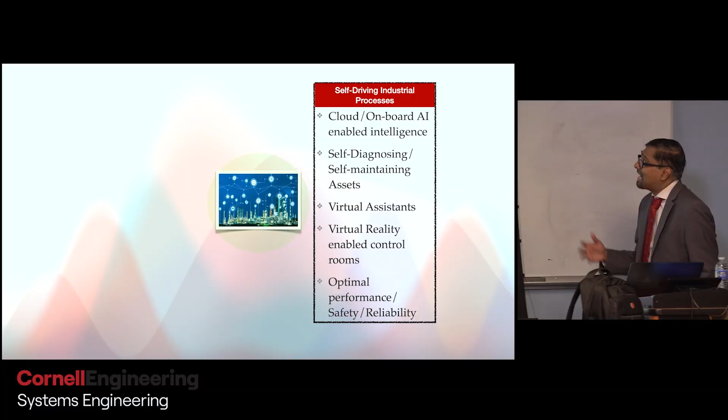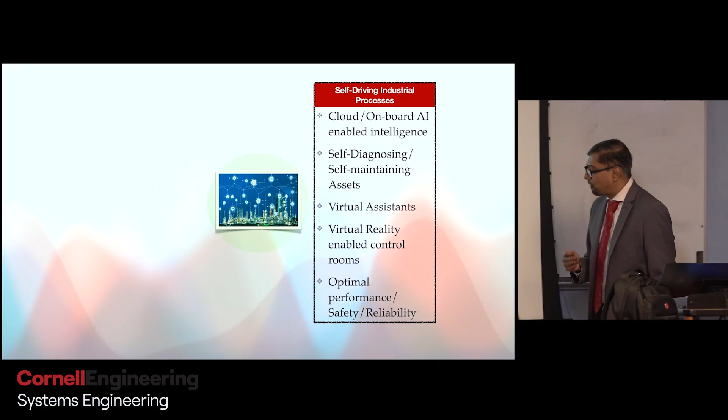So in my group, our focus is on building self-driving industrial processes that include cloud onboard AI-enabled intelligence, self-diagnosing, self-maintaining assets, virtual assistants, virtual reality-enabled control rooms, all of this while guaranteeing optimal performance, safety, and reliability. How do we get there? It's not an easy task. Most industries are already very highly automated, but I think the new tools that are available to us in machine learning and artificial intelligence will enable us to take the level of automation to a much higher level.

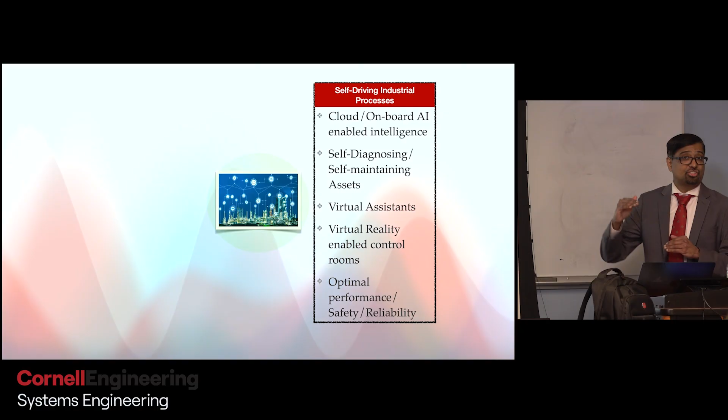In 2019, there was a really nice paper published by Alf Isaksson in the Journal of Process Control on different levels of automation that are possible in the industries.

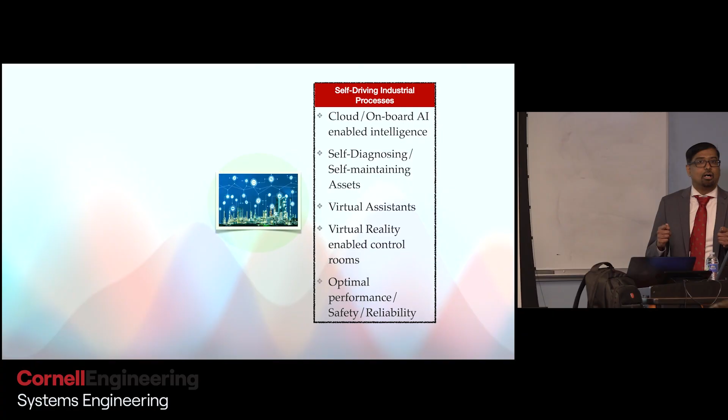With the new tools that we have, and by putting all of these things together, I believe a much higher level of automation can be achieved in the process industries. Now, in order to do that, you have to put together different pieces, and that's where we focus our research. I want to talk about some of the applications we engage in often, then the major areas, and after that we'll shift gears into reinforcement learning.

Canada, as you might know, is a really large country. In terms of land, it's probably larger than the United States, but we don't have the same population. Canada has only about 40 million people, approximately. It is natural resource intensive, meaning the industries in Canada are mostly in the natural resource sector.

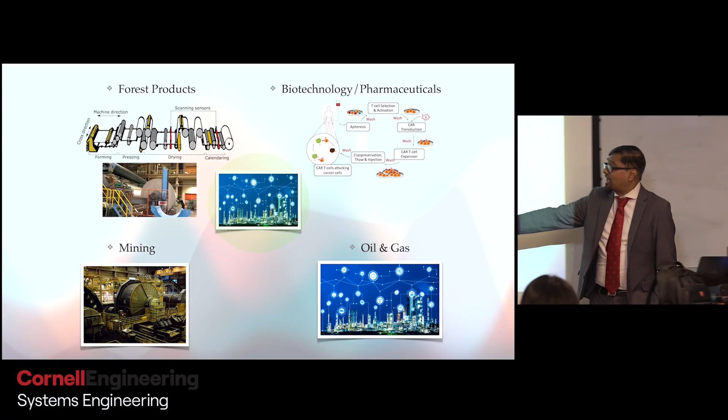We work with the mining industry quite a bit. We work with oil and gas industries. We also have very strong biotechnology and pharmaceutical industries. So these are some of the industries my research group works in.

More recently, we've been working on smart building, space, and energy management. For many years, we've also looked at advanced battery management systems, especially state of health and state of charge estimation. More recently, we've been looking at accelerated material discovery for carbon capture and storage. We also work on health analytics.

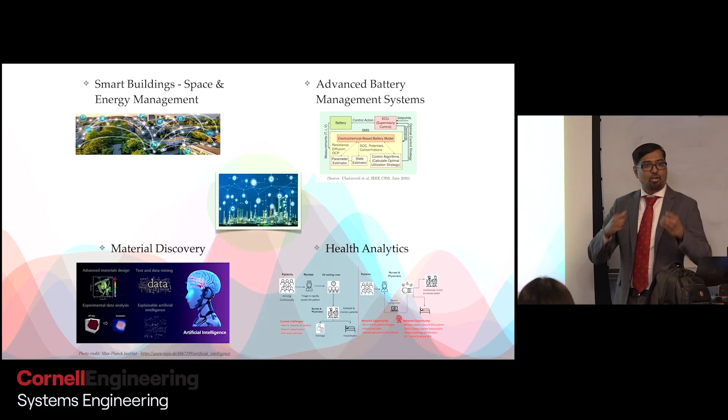For instance, we have a project right now where we are using sensors on patients in emergency departments, collecting a lot of data on their health - heart rate, oxygen levels, blood pressure, etc. - putting it in the cloud and using that information to triage patients more effectively and efficiently in healthcare settings.

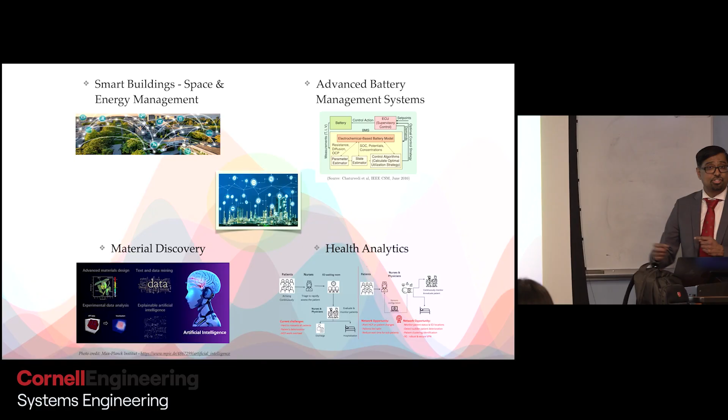For instance, Canada has a population of 40 million people, and apparently there are approximately 30 million visits to emergency departments every year, and the average wait time is about 7 hours or so. So what we're trying to do is use this data from the patients, put it in the cloud, and process it using machine learning tools to triage patients more effectively, and then process them through these emergency departments much faster.

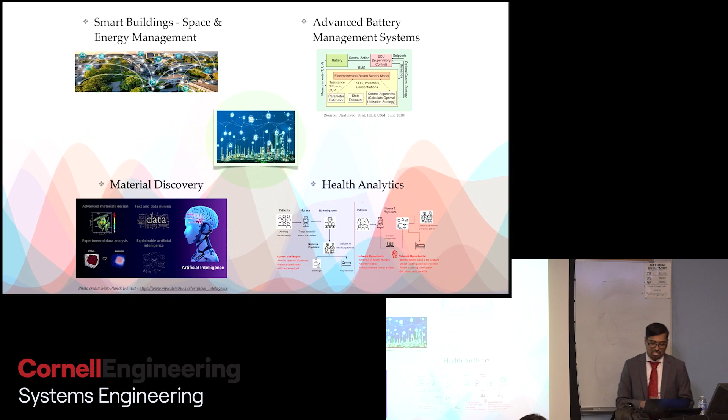So those are the application areas, and you're probably wondering what's the common thread connecting all of these areas. In all of those areas, except perhaps in biotechnology and pharmaceuticals, we generate enormous volumes of data. There's a lot of data, and often this data is heterogeneous - you have time series data, categorical data, images, text, videos, etc.

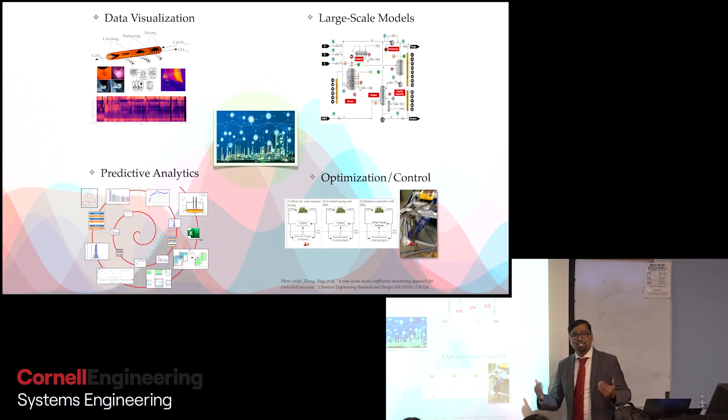In the past, in process industries, we used to focus primarily on time series data. We've been doing artificial intelligence in the process industries for maybe 3-4 decades - some of my senior colleagues would certainly argue that - but we've rarely used heterogeneous data. With the tools that we have today, we can use heterogeneous data to solve problems. So that's one common thread or characteristic across the different applications I showed you earlier.

They also are determined by underlying complex nonlinear dynamics that we don't fully understand in many cases. In other words, there's a lot of uncertainty associated with those systems - a lot of noise, stochasticity. So in light of all of these characteristic features that are common across the applications I showed you, how are we going to solve problems and generate actionable insights?

In my research lab, we work in 4 different areas. I am a firm believer in using data visualization even before you use any machine learning tools, in order to extract the most possible information out of data. Oftentimes you'll be surprised - just by visualizing your data in the right way, you will be able to extract a lot of insights from your data.

What you see on the left-hand side is data visualization. I have some projects on data visualization. The picture there is an infrared image of a lime kiln. Lime kilns are really massive - they apparently generate greenhouse gases equivalent to 300,000 cars running on the roads for one entire year.

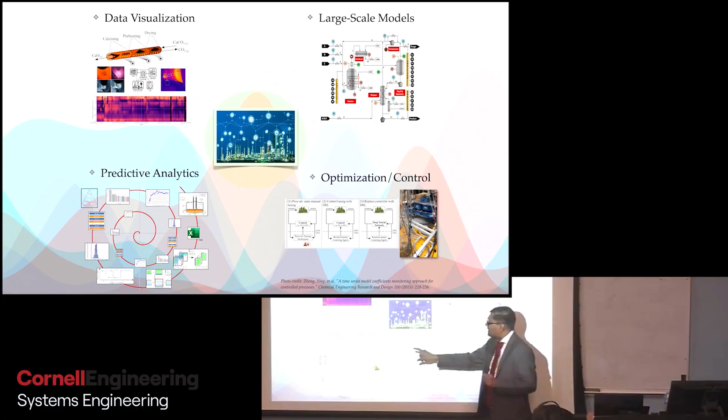The spiral graph that you see here was prepared by one of my students. This picture here is that of an electric furnace. It's a large electric furnace in a mining plant. The electric furnace has two electrodes. At the bottom of these electrodes, there's an electric arc that completes the circuit.

The electrodes are used to melt ore. Every once in a while, they lose the electric arc at the bottom of that electrode, and when they lose the electric arc, they have to restart the furnace. That takes about 15 to 20 minutes. In a year, they have about 800 to 900 such events, which means they lose effectively 2 weeks of production time because of this loss in electric arc.

What we did was we built a wide range of models to allow engineers to predict a loss in electric arc 5 minutes early with 75% probability. So that's one example of how models can be used for predictive analytics.

And finally, we are also interested in taking optimal decisions under uncertainty. You don't know what the future holds. There are lots of things that can go wrong, or lots of things that can change in the future, but you are generally required to take a decision right now to influence what might happen in the future. And that is optimization and control. There are many different ways to do this. And today, what I'm going to do is talk about reinforcement learning. Reinforcement learning is an approach to take optimal decisions in light of uncertainty.

This is a pilot scale facility at Honeywell that we use to design these controllers and implement them. I'm going to talk more about this picture as we move forward with the slides.

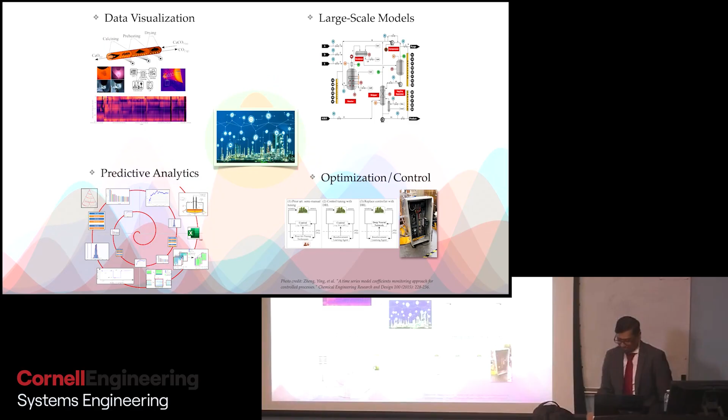Right? All right, so that takes me to the topic of today's presentation: stable and sample efficient reinforcement learning.

How many of you are familiar with feedback control? I would assume everybody, right? Okay, so I'm seeing mostly people nodding their heads, but let's just quickly go through this, just in case you're new to Cornell or new to the systems engineering program.

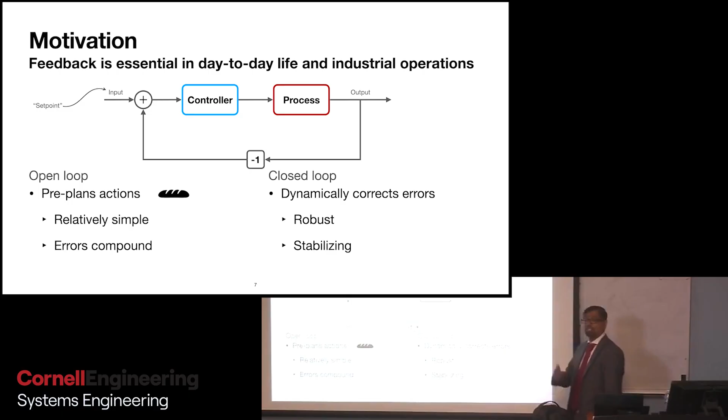This is a standard feedback loop. We don't use open loop because if you use open loop, you have to pre-plan your actions. It's relatively simple, but errors often tend to compound, meaning you won't be able to track your input signal. On the other hand, if you have a closed loop system, then you can dynamically correct errors. Closed loop systems are robust, and they can also be stabilizing.

But the problem is, typical process industries have hundreds of these loops, hundreds of controls, hundreds of closed loops. If you have one control loop, it's manageable. You can identify a model, you can synthesize a controller, and validate it. But what if you have hundreds of control loops? That calls for a new paradigm. Is there a way to automatically scale your controller and tune all of them at the same time?

There are, of course, controllers, multivariable controllers like model predictive controllers, but I'll tell you why tuning them is not straightforward. A few years ago, when I was doing my PhD, an engineer working at an oil refinery told me that a vast majority of their controllers are actually not tuned because they just use default settings. Default settings in these control loops are robust, they give you robust performance, but they don't give you the performance. Often, because of lack of time and the effort involved in tuning control loops, engineers tend to use default settings. What it means is you have a stable process, but you're not extracting the best out of your controllers.

So the question that we wanted to ask was, how can we scale these control algorithms? Is there a way to go from process data to the controller directly without having to go through those steps: model identification, synthesis of a controller, and validation?

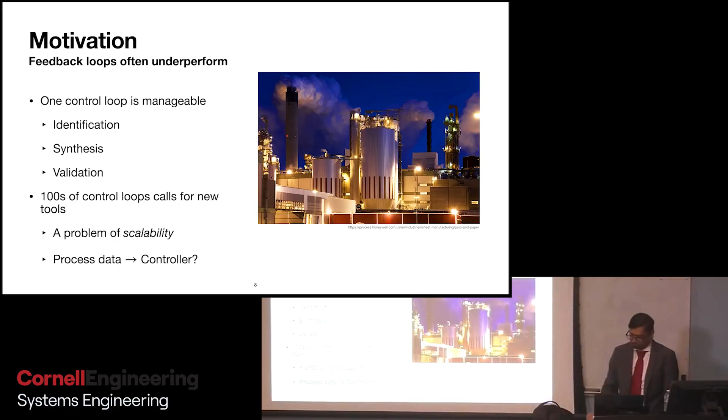So I think in 2018, when deep learning was taking off, there was a lot of interest in it. I went to Honeywell - we've had a very long collaboration with them in North Vancouver - and told them there's this new algorithm, deep neural networks, and we can combine them with reinforcement learning and replace all your control systems. They have existing hardware and software infrastructure they've been using for decades, so I proposed this framework to them.

So you have some system. I'm going to replace your controller, or approximate it, with a deep neural network, and then add a reinforcement learning agent on top of it.

You might ask, why do you want to do that? The current state of art is depicted in this picture here. You have a system, there is a controller, either a PID controller or a model predictive controller, and those controllers need to be maintained. If you don't maintain them, you're going to lose the performance from those controllers.

For instance, someone from a refinery showed me a very interesting graph. On the x-axis you have time, on the y-axis the performance of a model predictive controller. Typically it takes about two weeks for a few engineers to design and commission a model predictive controller on a large-scale process, and then you start reaping the benefits of having installed it.

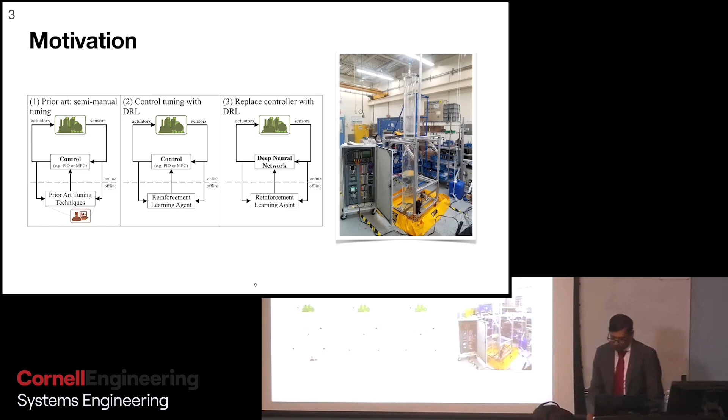Now, there are a few problems. As soon as we started thinking about it, a few challenges became very obvious. I'll describe what reinforcement learning is in just a moment, but think of it as a tool that allows you to take optimal decisions in the face of uncertainty.

You can leverage observed data to improve operations, directly using the data to improve your ability to control a process. If you're using reinforcement learning, you need minimal prior domain knowledge - in other words, you don't need a model. You can of course use a model to build a reinforcement learning controller, but even without one, the beauty of reinforcement learning is it's going to probe the system and help you design a controller or agent that's going to control your system. Therefore, you can automatically maintain controllers on a variety of systems. That's the benefit of reinforcement learning: it's going to probe the system, learn it, and automatically start controlling it.

But the problem is it's going to introduce additional algorithmic complexity. There are auto-tuners that already exist in the industry - for instance Honeywell, and all the major vendors of control software have existing auto-tuners. And when you use reinforcement learning, you really have to guarantee stability during and after training. Stability is an absolute minimal requirement when designing a controller. If you can't guarantee closed-loop stability, nobody's going to use those tools. So we wanted to make sure reinforcement learning guarantees stability. There are not that many results in the literature on reinforcement learning that is guaranteed to be stable.

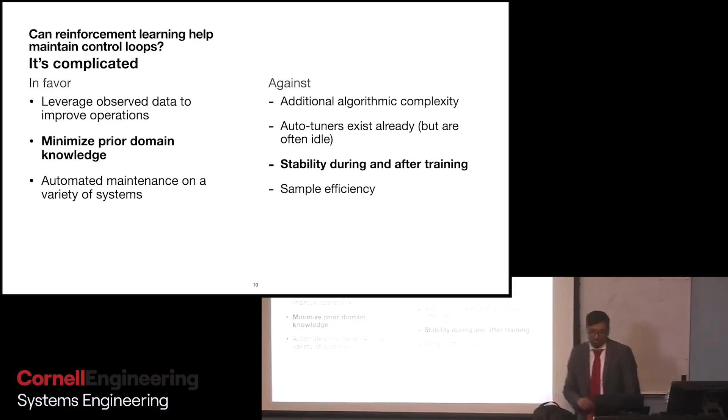Our goal really is to balance automation and scalability of reinforcement learning with control theoretic tools to create efficient and safe improvement. In the next few minutes it's really simple right now, and we're going to slowly ramp up the complexity of these algorithms. If you don't understand, it's okay, I don't expect everybody to understand everything I'm saying. If you do understand, come to me, I'd like to offer you a job. But there are a few takeaway points I hope you can get by the end of this presentation.

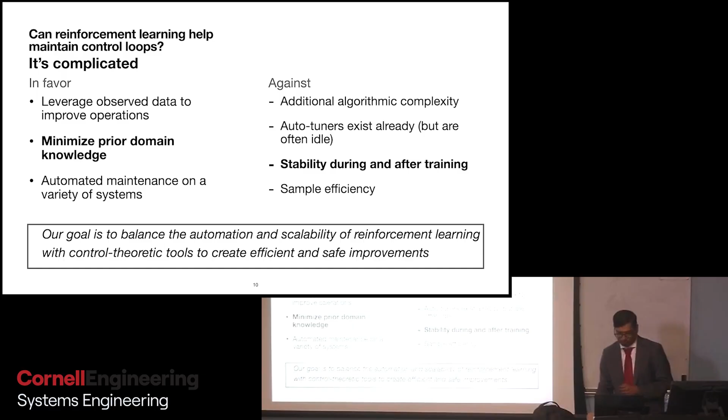We're going to do this with reinforcement learning. Reinforcement learning has been around for many decades, you've probably seen it or heard about it in many different ways. Right now it's widely used in a number of different areas, it's used in building games, software for games, it's used even in fine-tuning large language models, and it can replace control theory. There are a lot of parallels between control theory and reinforcement learning. I think these two areas have developed over many decades in parallel, but there are lots of areas of commonality.

The idea is if you have an environment or a system, you use an RL algorithm and an RL agent that's going to generate some actions. Those actions result in observations. Observations are then used by the algorithm to generate new actions using what is called a reward. The agent is given a reward function, and its goal is to maximize that reward as it performs actions. I'll get into reinforcement learning again in a few minutes, but that's broadly the idea at a high level.

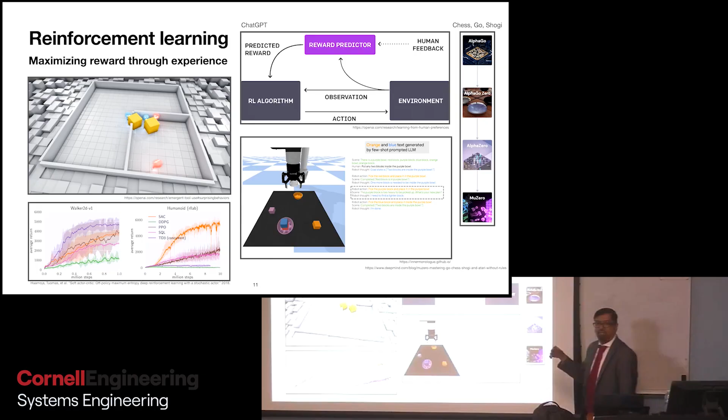Reinforcement learning people have been using reinforcement learning in process systems engineering. There are many papers published recently. I would say one of our papers, I think it's here, it's probably not here, that one over there, was probably one of the first papers published in PSE with deep reinforcement learning.

Although I would credit Professor Jay Lee at University of Southern California for introducing reinforcement learning in PSE. They did not call it reinforcement learning, and I think that was their mistake. They called it approximate dynamic programming. A good friend of mine at Seoul National University, who worked with Professor Jay Lee, was instrumental in bringing these ideas to process systems engineering.

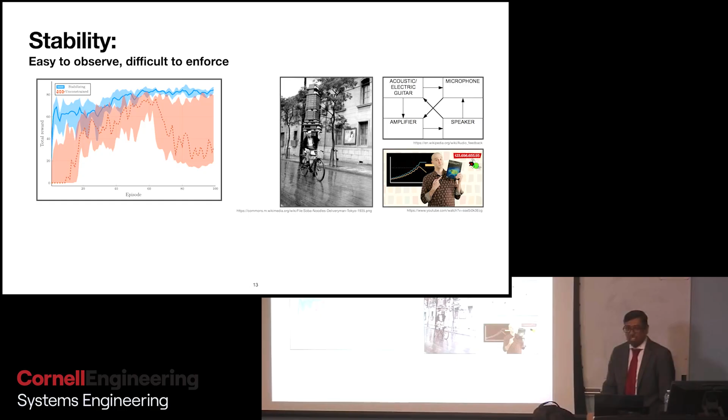Now as I mentioned earlier, the problem with reinforcement learning is that we cannot guarantee stability, and we also want to make sure that it is sample efficient. It's not consuming a lot of data.

All of, or a vast majority of, applications of reinforcement learning that you see in computer science are, say, in gaming or related areas where you have a lot of data you can simulate. For instance, if you want to build software that plays the game of chess, you can generate lots of data. There is no limit to how much data you can generate.

But on the other hand, if you want to use reinforcement learning in real systems, in the process industry, you cannot generate lots and lots of data because generating data costs money. There was a speaker from Stanford who gave a talk at UBC maybe a couple of years ago, saying that they do some physics experiments at Stanford. Collecting one data point costs them $1 million.

So you can't use a tool like reinforcement learning to generate data from experiments of that type. I mean, that's an extreme case, but in many systems engineering problems, generation of data does not come free. You have to be very careful in generating the data. So sample efficiency is a problem with reinforcement learning.

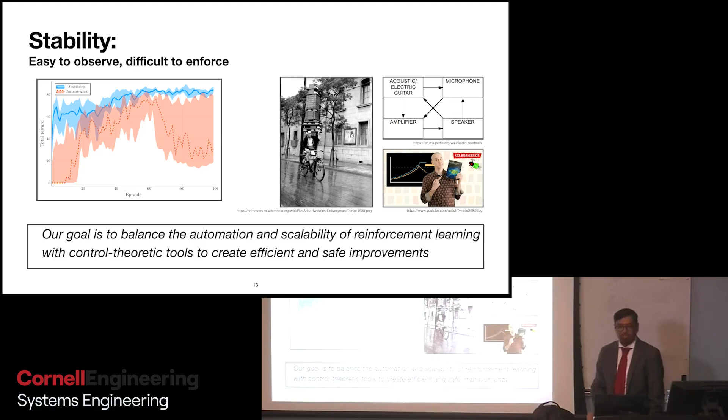So I'm going to start with stability, and I'm going to assume that you all know what stability is. So how are we going to guarantee reinforcement learning is stable throughout its iterations? I'm going to divide this into 3 pieces.

I'll talk about something called Willems' lemma that allows us to characterize the dynamics of a system using data without having to use an explicit parametric model. And then I'll talk about something called Youla-Kučera parameterization, that's a recipe for characterizing all stabilizing controllers.

And finally, learning algorithms. We're going to use reinforcement learning. We'll put all of these three things together to come up with a modular setup that really decouples learning from stability. How many of you know any or all of these 3 ideas or tricks?

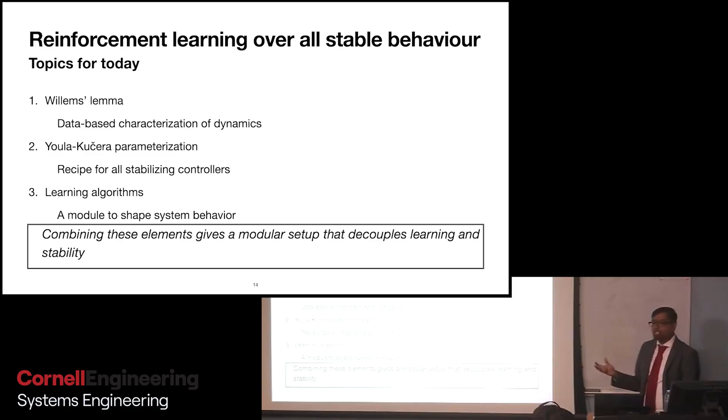Or have heard of? Did anyone hear about Willems' lemma? No? Okay. Youla-Kučera parameterization - if you've taken a course on classical control theory, you would have heard about it. Learning algorithms, I'm going to talk about reinforcement learning. So we'll take our time, and I'll go slowly and try to explain what these are. Hopefully you can take these ideas and use them in your own research or projects.

I'm guessing you're all familiar with standard linear time invariant systems. That's a standard state space model. U's are inputs, Y's are outputs, X's are some states. A, B, C are state space matrices. For simplicity, I'm going to assume that inputs and outputs are scalars. A, B, C are unknown, but we can observe U and Y.

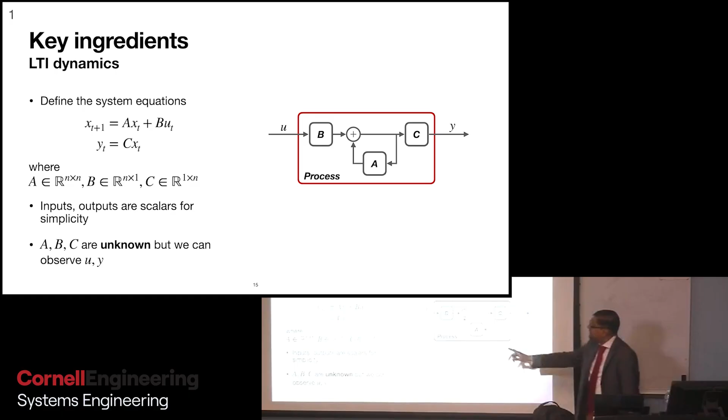A simple state space model. A lot of systems in the industry can be locally, at least, defined using this very simple equation.

You've all heard of, I'm guessing, impulse response - if you all know what an impulse response is. So if you have a state space model, you can very easily write down expressions for the impulse response. The Nth impulse response, Yn, is going to be the product of your state space matrices, C times A to the power of n minus 1 times B. So that's the impulse input, and that is the response.

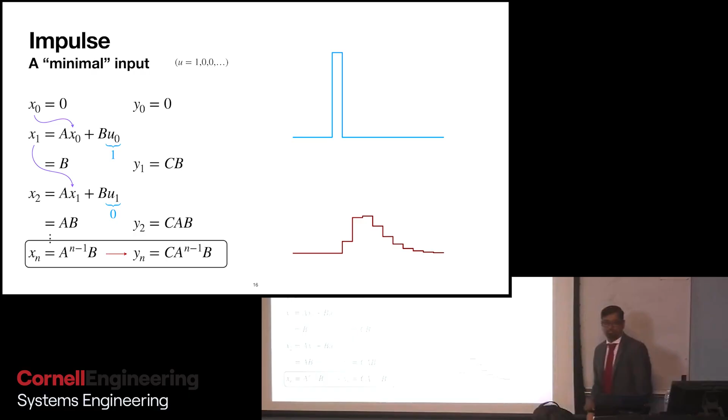There are a couple of concepts I'm going to use to describe Willems' lemma. One is controllability. We've probably heard of controllability and observability. Controllability is the ability to steer a system to any state of our choice. So if you can steer our system to some arbitrary state x star using a certain input, if an input exists so that we can move the system to that x star, then we have a controllable system. It turns out that the matrix with the calligraphic C, if that matrix is full ranked, then you have a controllable system. That matrix is derived from the state space model.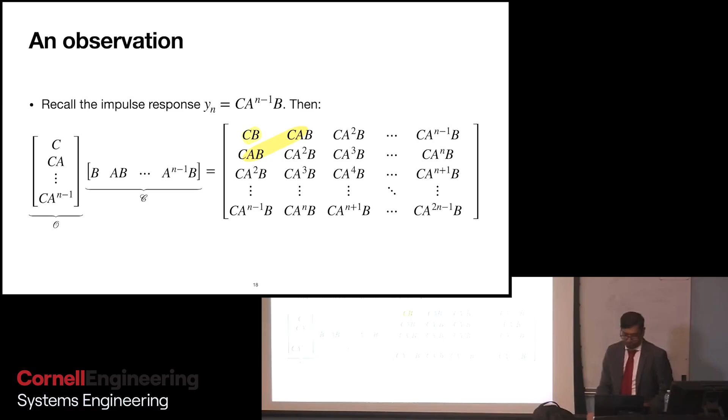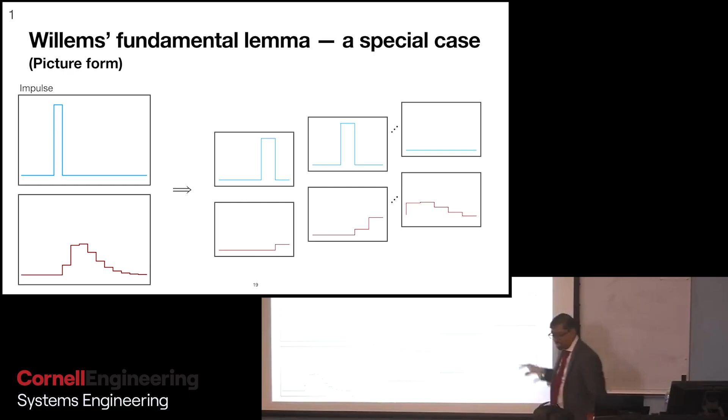So how does it do that? If you have an impulse response, the beauty of linear systems is when you scale or translate the input, you can do the same with the output without having to recalculate everything. So you have an impulse, and then you can move that impulse and generate more impulse responses very easily. As long as you have that, you can generate all of these. And the span of these data vectors really characterizes the input and output combinations, any input and output combinations of a system.

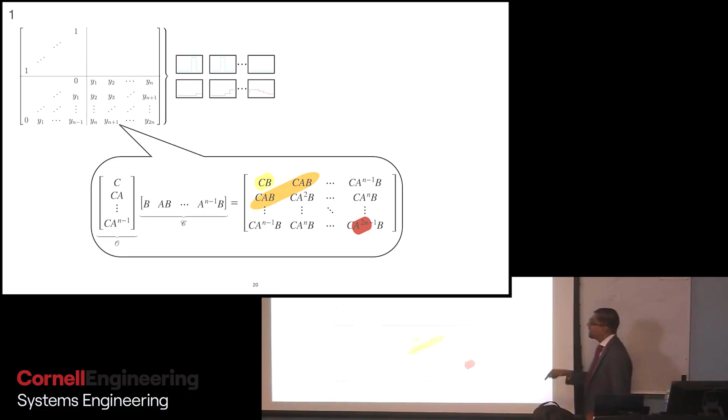Let me take a pause here and explain what I'm trying to do. That matrix on the left-hand side, the span of that characterizes every combination of an input and output of a linear system. And that is Willems' lemma. Let me generalize that.

If you have a given signal zt with capital N data points, we define a Hankel matrix, very similar to the impulse response Hankel matrix I showed you earlier. Willems' lemma essentially states that if you take the Hankel matrix of some inputs and concatenate it with the Hankel matrix of the outputs, the span of that matrix will include every combination of U and Y that you can achieve from a given system. U bar and Y bar are some new arbitrary data.

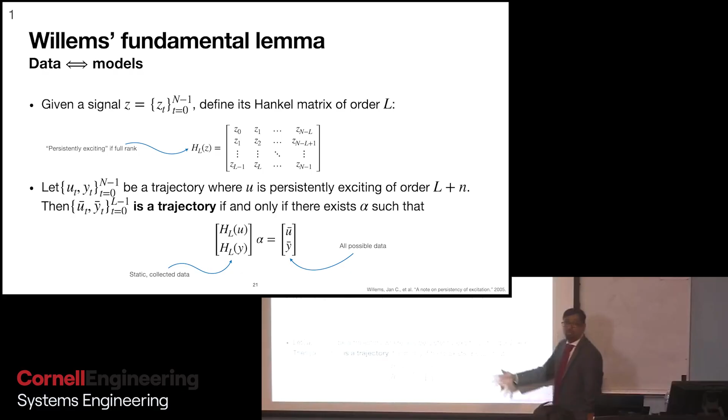So if I collected data U and Y, the data have to be persistently exciting - that's a very important criteria. If the data are persistently exciting of a certain order, and I create these Hankel matrices, H U, H Y, then any new set of data, U bar and Y bar, can be written as a linear combination of the input and output Hankel matrices. That's the core of Willems' lemma.

So what we did was we took Willems' lemma - because once you can do that, you've essentially characterized the dynamics of a linear system, right? Once you have that, you know what the linear system is. So we took Willems' lemma and modified it slightly to account for predicting future outputs. We use what are called nested Hankel matrices. There's a little bit of modification of those Hankel matrices, but it allows us to make predictions on the output. Given any input, we can use these Willems' lemma Hankel matrices to predict what the future is going to be.

Now, the central idea here is we did not use an explicit parametric model to make predictions on the output. We've used existing data. As long as the data are persistently exciting of a certain order, we can use that data, create these Hankel matrices, and that essentially becomes our model. We use that to make predictions into the future.

Yeah, so I think maybe I misunderstood - what do you mean by persistently exciting? Okay, that's a great question. Let's take a simple example. Are you familiar with ARX models, Autoregressive models? The beauty of ARX models is that you can solve for parameters using least squares. So when you use least squares, you have to invert a matrix, right?

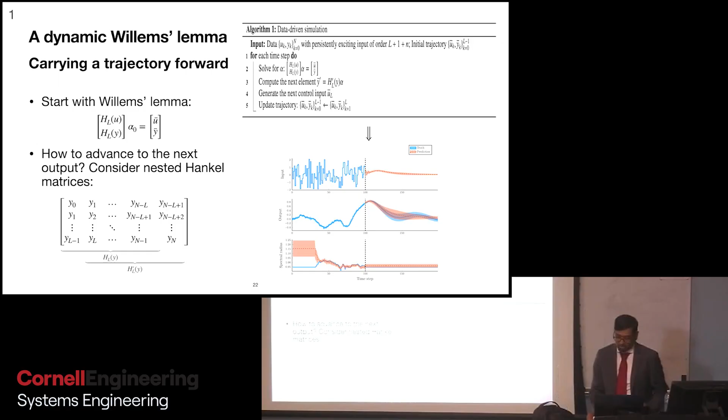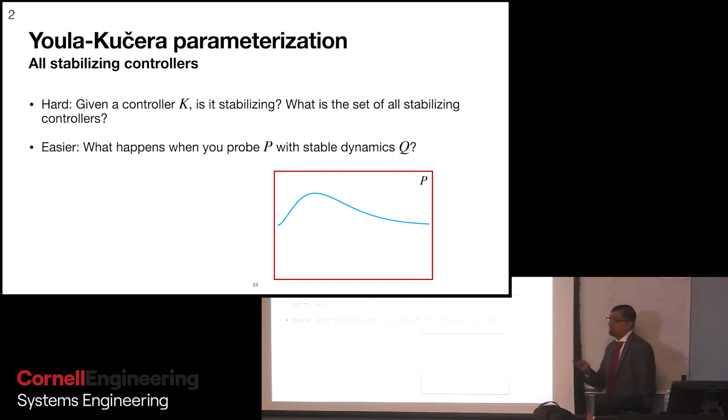Okay, thank you for all those questions. We're going to be a little slow, but that's okay. I have time until 1:15, is that right? Yeah, kind of, about 1:15. We've only made halfway through my presentation. But I appreciate you coming because there's another class. So 1:15, right? They get to ask questions then. Is that right? We stop at 1:15. Okay, alright. So then let's go. A condition, alright. Okay, let's go a little faster now.

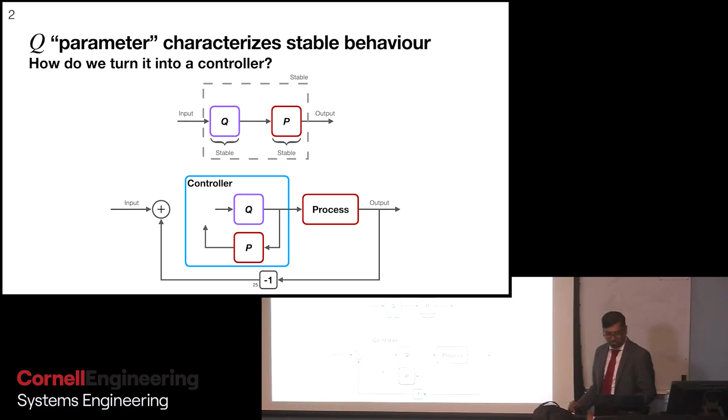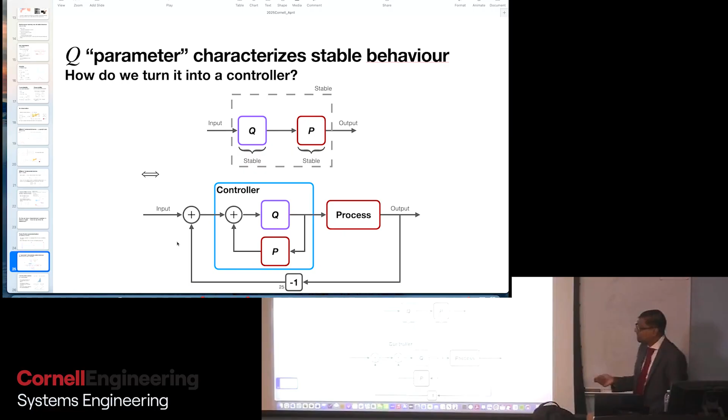So Youla-Kučera parametrization basically says that if you have a controller, a linear controller, and if you can parameterize it in this way, where you use an approximate model of the process P inside the controller and use a Q in this positive feedback structure, as long as you guarantee that this Q is stable, you can also guarantee that the closed loop system is stable. That's what Youla-Kučera parametrization is. You're parameterizing the controller with the model of the process and some new parameter Q. As long as you can guarantee that parameter Q is stable, then the entire closed loop system is also going to be stable.

So what we did was we figured out a way to guarantee that the Q is stable, even for nonlinear systems. This was a paper published in NeurIPS in 2020, 'Almost Surely Stable Deep Dynamics.' We build deep neural networks for Q that are always stable, guaranteed to be stable. Those are nonlinear, by the way—we can use nonlinear Q there, not necessarily linear Q.

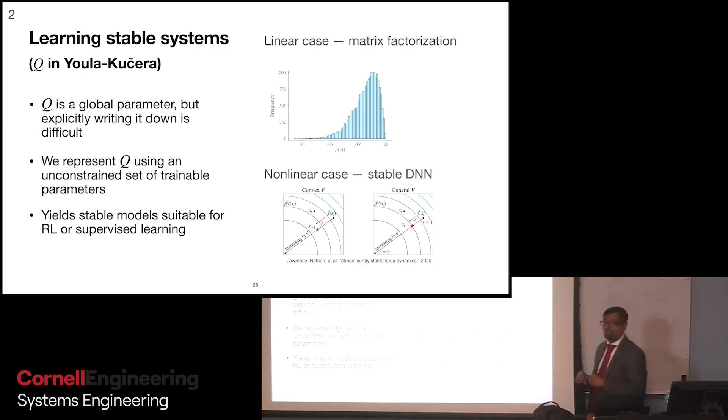I know some of this is probably a bit too much to learn in just a few minutes. So we have two ingredients right now: Willems' lemma, and then the Youla-Kučera parametrization to guarantee stability.

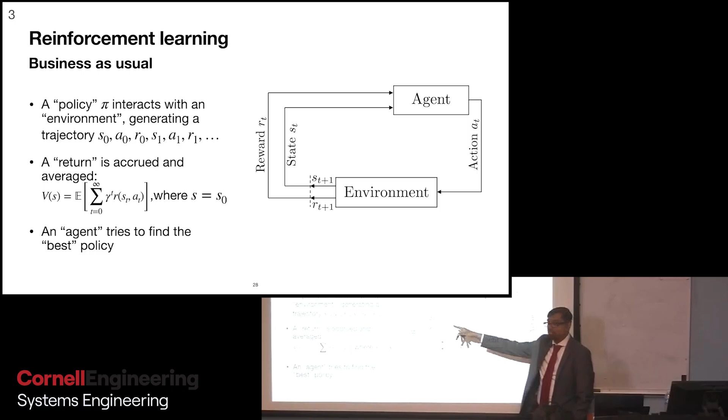And the final ingredient is reinforcement learning. In reinforcement learning, you have an RL agent that generates actions a_t, the environment generates a reward and also a state. The agent looks at the reward and updates its actions. You go through these loops many times iteratively to maximize a certain reward by identifying a policy, which I'm calling pi. Policies are also called, basically, controllers.

Now when you put all of this together, you get reinforcement learning over all stable behavior. This is a representation of the data Hankel matrix in Willems' lemma—that's your model, the process P. This is a representation of all stable Qs, and this is your industrial process. And when you put all of these things together, you will be able to separate learning from stability, and therefore you have a closed loop stable reinforcement learning algorithm.

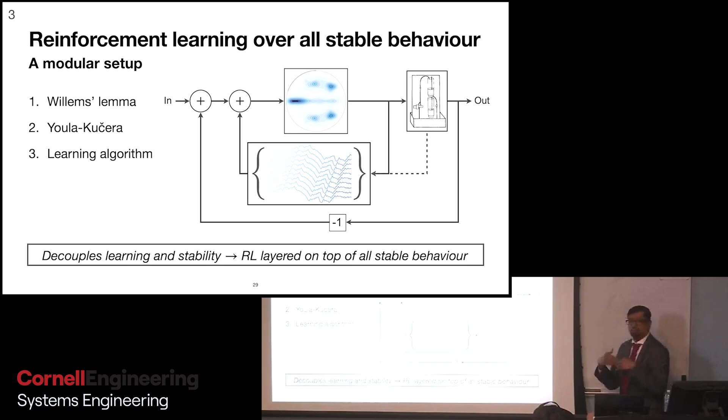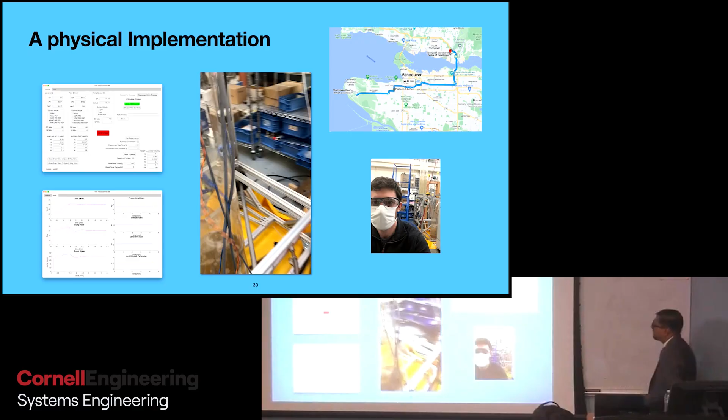We've tried this on a pilot scale plant. That's Nathan Lawrence—he's currently at Berkeley as a postdoc. What you see there is a pilot scale plant that was set up for us at Honeywell.

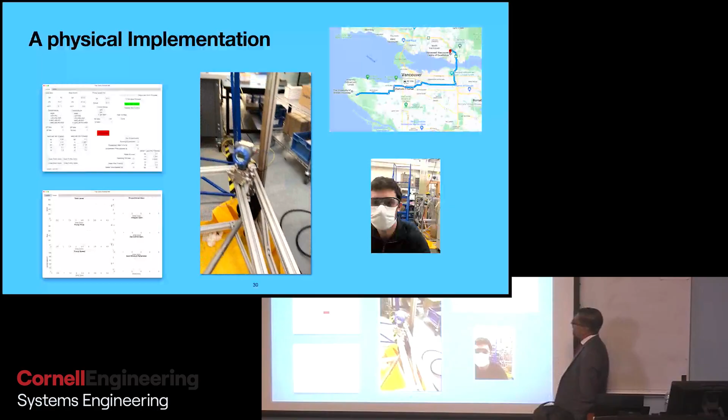University of British Columbia is over here. Nathan used to drive to Honeywell in North Vancouver to perform these experiments. He did some of these during the pandemic, that's why he's wearing a mask.

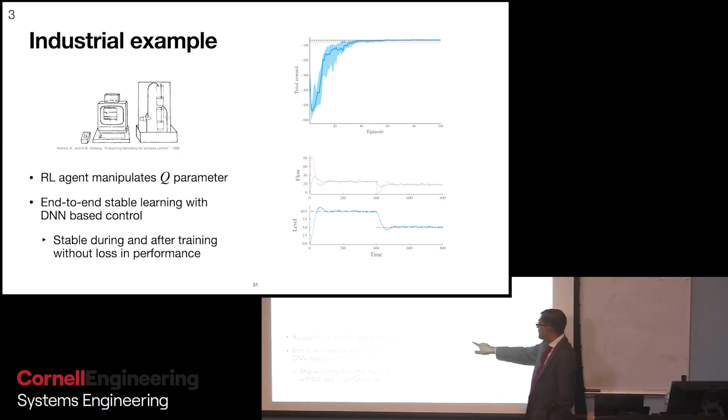As expected, we found that the closed-loop system was always stable, and the system was also tracking the set points really well. I'll give you 5 minutes, I won't be able to finish my entire presentation, but I'll give you at a very high level some of the ideas.

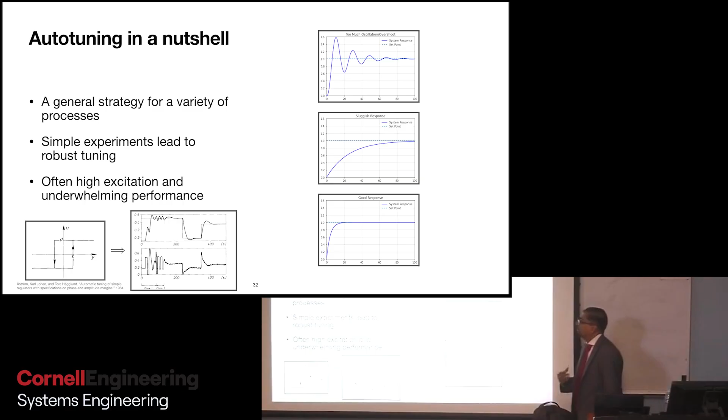So when we finished that, we did all these experiments on a real system, but then we wondered, okay, Honeywell already has these auto-tuners. Why don't we compare what we did with Honeywell auto-tuners? And we very quickly realized—I'll just show you this picture here, this table.

This is a paper that was published in 2024, Control Engineering Practice. Deep RL is our algorithm. AccuTune is a Honeywell auto-tuner. SIMC is Skogestad internal model control—he published a paper, I think, with the title 'The Best Tuning Parameters for PID' or something like that. And on all of these different criteria that we use, deep reinforcement learning performed much better than other controllers, except in one criteria.

That one criteria is time required for tuning. Auto-tuners would tune a controller in about 5 minutes. Deep reinforcement learning took 40 or 50 minutes, right? And that's not acceptable because you're losing production in a live setting.

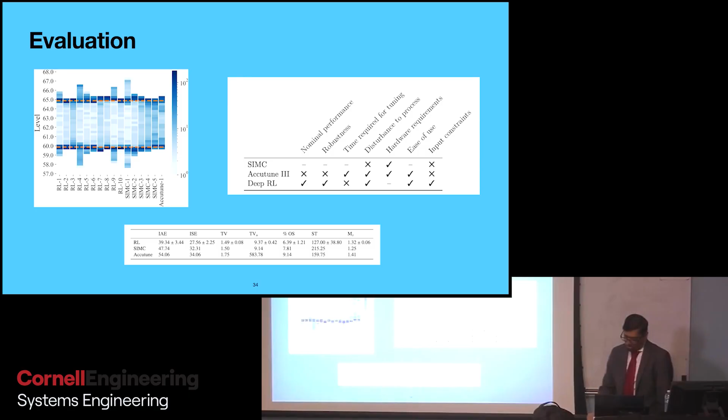So that really spawned a lot of research from my group on sample efficiency. How do we improve sample efficiency? Naturally, if you can...

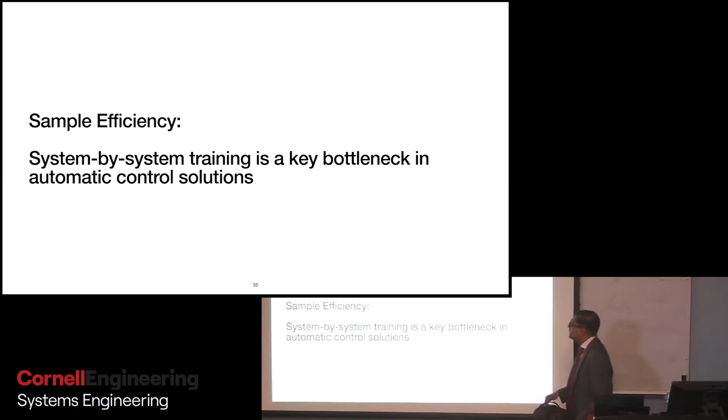If you provide reinforcement learning with a model, it's going to do far better, right? All of our experiments were done without a prior model. But having a model is not always easy—there are lots of reasons why you may not have a high fidelity model. So we then thought, okay, maybe there's some middle ground where you don't give it a complete high fidelity model. Instead, you give it something in between, some partial information, maybe a model structure, maybe some parameters you know. And that led to a lot of work on improving sample efficiency.

One of those algorithms is what is called meta reinforcement learning. I don't know if anybody here has heard about meta reinforcement learning. The idea there is: if you have a system, you assume all possible models for the system, you train your RL agent offline, and then you take it live. When you take it live, it quickly figures out what system you have among all the systems that you trained it on and starts controlling it much better.

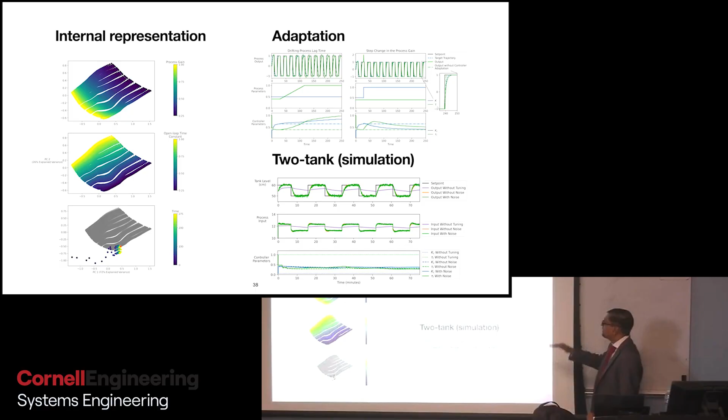So this meta reinforcement learning is a lot more sample efficient than the vanilla off-the-shelf reinforcement learning algorithm. We've then tested it on a wide range of processes. It helps you in adapting to changing process conditions, and especially when your process conditions are changing, it performs much better.

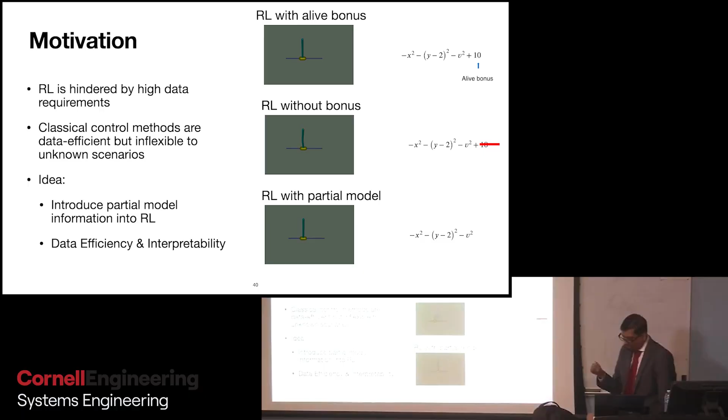Okay, I'm going to show you—I just want to wrap up in 2 minutes, then you have 5 minutes to ask me questions. In addition to that meta reinforcement learning, one of my PhD students, who's just wrapping up his PhD, did some really interesting work on incorporating prior information into the reinforcement learning algorithm.

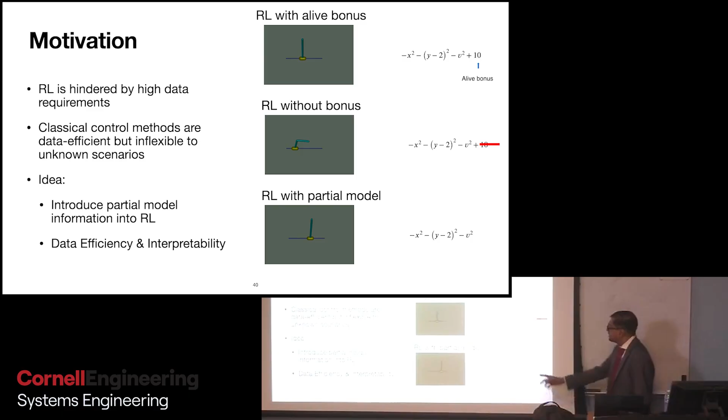I'll just explain what is here. This is a very simple pendulum example with that reward function. If you give this reward function, off-the-shelf vanilla reinforcement learning would do really well. But if you change the objective function, the reward function, remove this term, then it's not going to be able to control the pendulum. This is our approach with partial information—we are able to control the pendulum with limited or partial information.

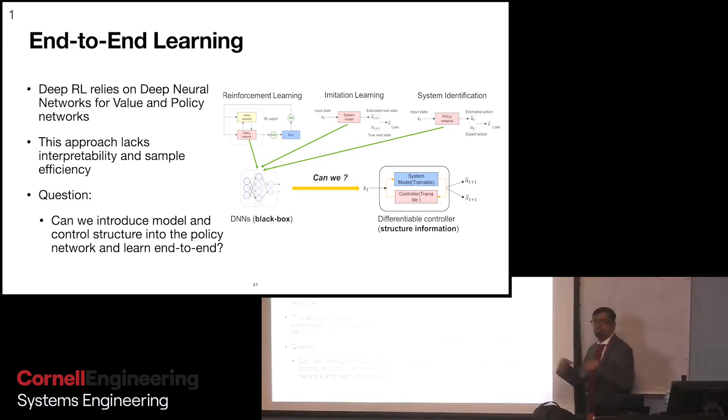He then extended those ideas to develop what are called end-to-end learning algorithms. There, the idea is: in reinforcement learning, you typically approximate the policy using a neural network. In deep reinforcement learning, that's the common approach. What we have done is we have embedded control and model structures into the neural network and trained all of them together at the same time for end-to-end learning.

Instead of having to tune the controller, you treat that as the last layer of the neural network and tune it. The problem is when you have MPC or LQR, they're not differentiable—you can't differentiate them. So when you're training networks, you have to go through a forward pass and a backward pass, but that's not possible if you have MPC or LQR. My student was able to overcome that using fixed point iterations. That's probably not easy to understand, but the idea is to embed the control structure into your neural network and train everything at the same time.

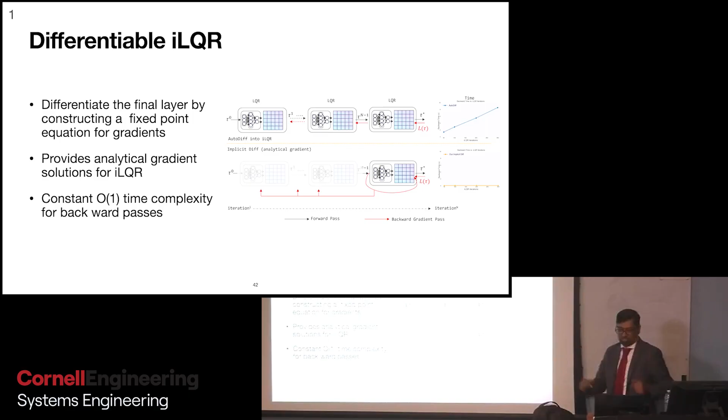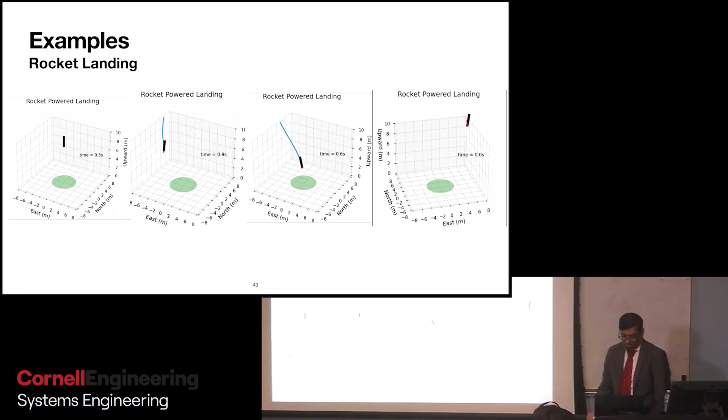Okay, so that leads to much better results from reinforcement learning. This is a very simple simulation of a rocket landing, starting from different initial points. We do not provide reinforcement learning the entire model of the rocket, only the structure of the model. Some parameters are given, maybe one or two, but a lot are missing, and you see that it works really well and lands the rocket on its landing pad.

Right, so I'll show this last example. Again, this is our proposed approach where the robot is able to track a previously determined path really well with partial information given to it. We don't give it the entire model, just a few aspects of the model. On the right-hand side is a robot that's not able to track.

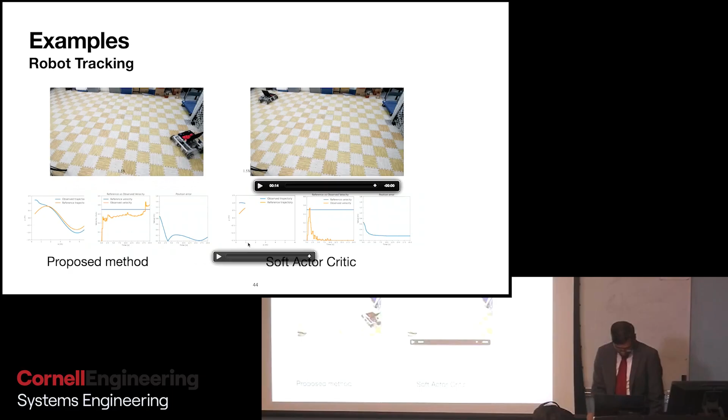If you use soft actor critic, a very popular reinforcement learning algorithm, okay, I'm not sure, it's not moving on the right hand side. I'm not sure why. Okay, there.

All right, so I know there's probably a class after this. I think the big takeaway for all of you here is reinforcement learning is a great tool if you want to maintain your controllers automatically without human involvement. But the challenge is you have to guarantee stability and sample efficiency. Those two are critical. Because of those two reasons, I think reinforcement learning is not yet ready for wide adoption in the process industries. But if we can fix stability, which we have done to a large extent for linear systems, and if we can also achieve good sample efficiency, then there are benefits to using reinforcement learning. Okay, I'm going to pause there, and I'm happy to take any questions. Thank you very much.

Please, so you had the slide where you proposed the deep learning controller plus the RL, but then the compromise was regular controller plus RL. What are the performance differences between those two by going with the compromise? And I guess why would that intuitively be the case if it's assumed to be a linear plant anyway? Is a linear controller not optimal?